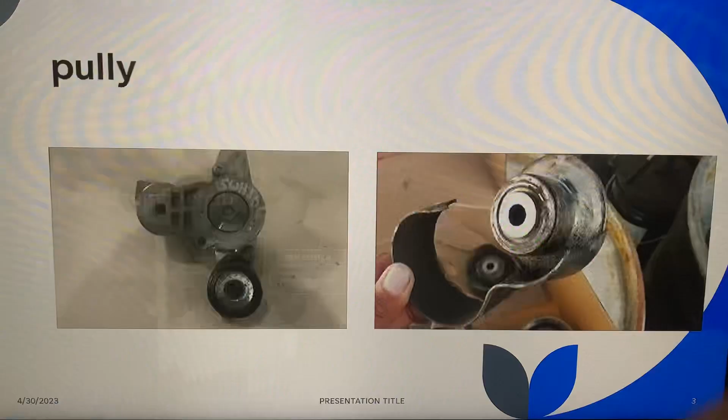This could be the reason why your belt is not staying on the engine fan. Here's the list: you want to check your pulleys, the belt, the fan assembly, and the hub assembly. This is the clutch, this is the hub assembly.

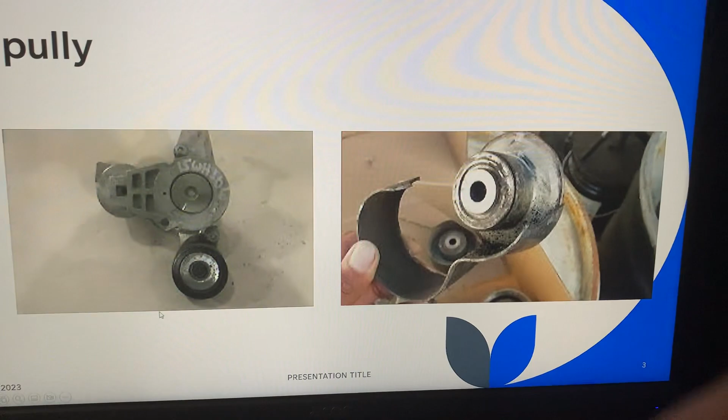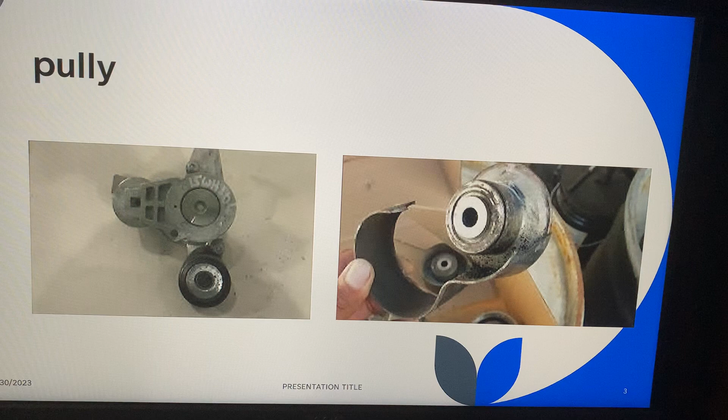If your pulley is shot, you need to get a new pulley. On the road it could be very expensive, and since we have part shortages, it could be a pain to get one. So once your pulley starts to look old or makes noise, it's better to change it and keep the old one just in case - it could help you out on the road.

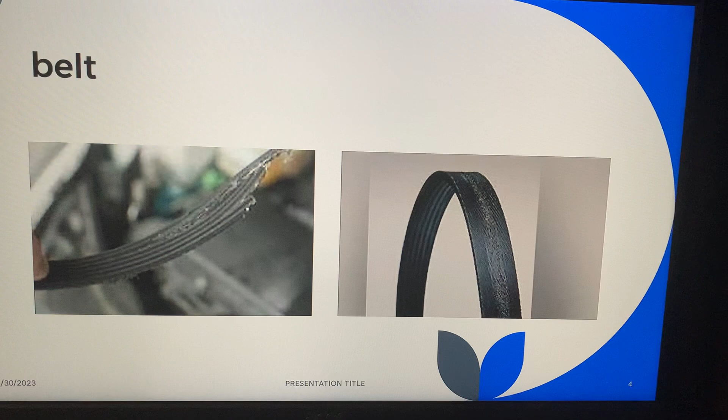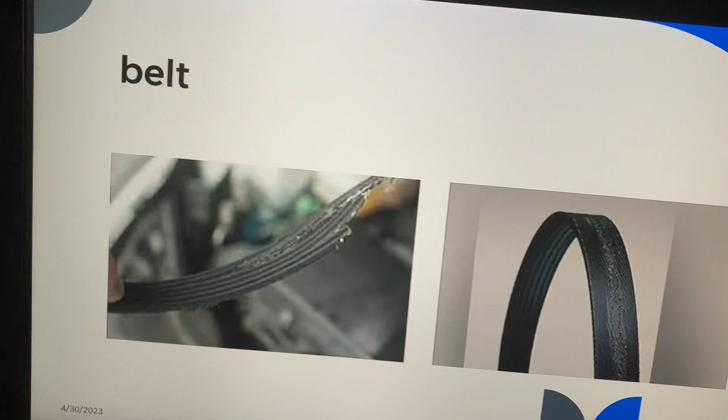Check the belt and see how it looks once it comes off. If it's all chewed up, it could be your pulley that's bad, or your fan assembly. Also look at the back and front and see how old it was. If it's a really old one, it could just be a belt problem.

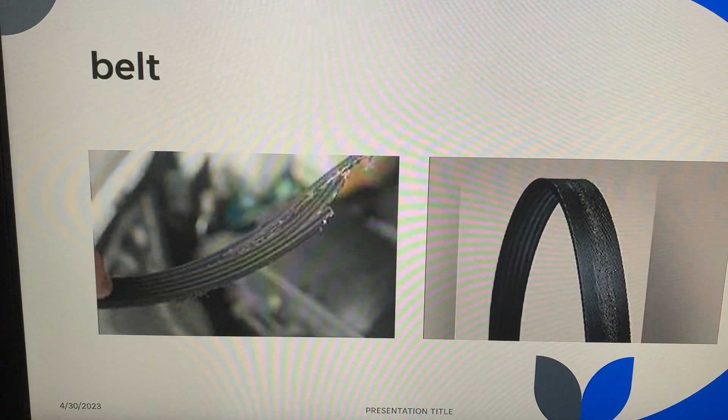But do look at how it's torn, so you have a better understanding if it's just a belt issue or another issue that's causing the belt to come off.

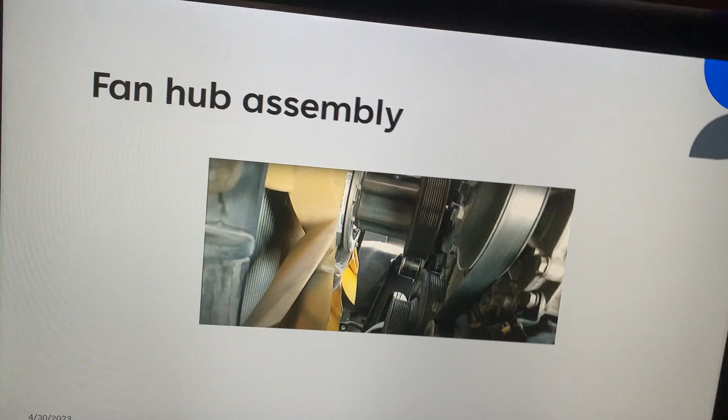Fan assembly - your fan hub might still look attached, but try to shake it. Put your hand right there and try to shake it, making sure the truck is off. If you can shake that thing, it's broken.

And putting the fan belt back on, you're basically grenading your radiator, because after a while it might help you get moving, but this will literally detach and hit your radiator, and who knows what else it's gonna hit when it breaks off from the engine.

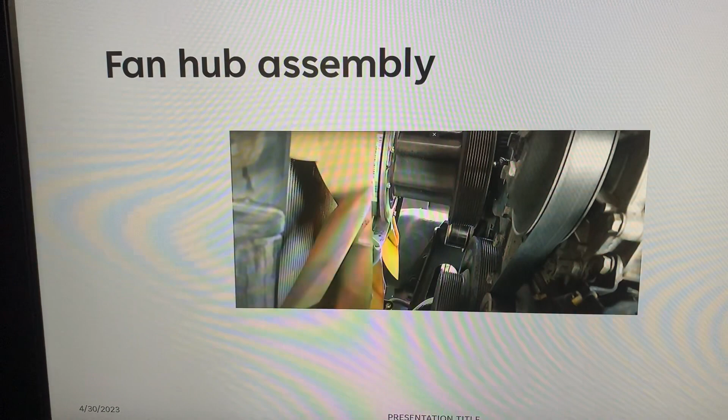There is a bearing here. When it's loose and you can shake it, the bearing inside is shot - it's no longer good. It's better to have it changed right away once you find out that's your issue, rather than destroying your radiator and having to break down on the road and tow the truck, because your truck is not going to move once you lose all the coolant.

So if your belt is okay and was new when it came off, and your pulleys are spinning freely, but you check your hub and it's shaking, get it replaced right away. Don't play around with your hub assembly, because it's gonna cost you thousands of dollars more in repair if you don't change it.

Once it starts shaking, just replace it. I would not try to see if I could make it to the next truck stop or something like that. You probably can keep the belt off and try to get the truck to the truck stop.

Just watch your coolant temperatures. If it starts to get hot, turn it off, wait, let it cool down, then you can move it again. But you need to know what you're doing in order to get your truck to a shop.

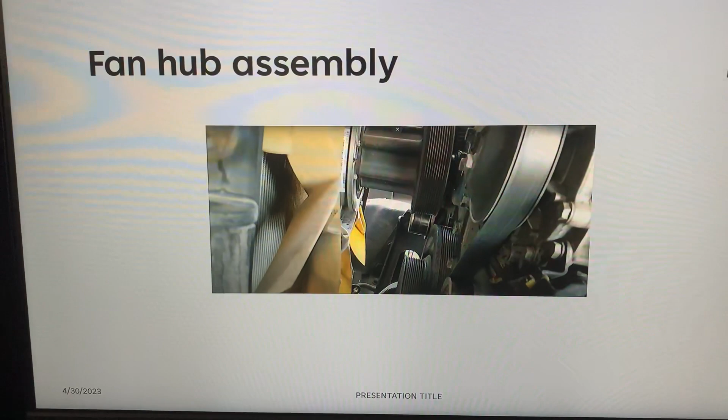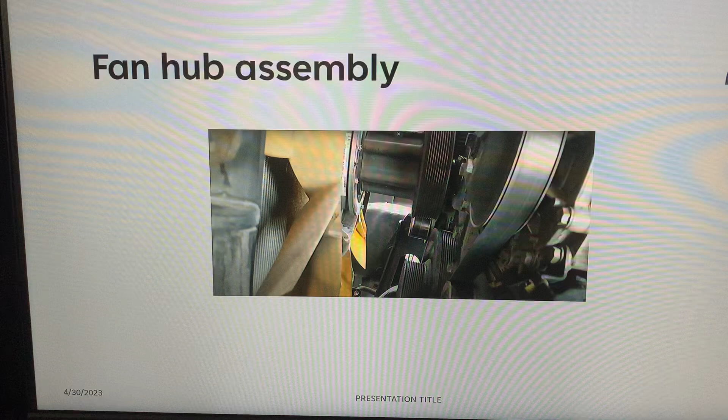You have to understand how the truck works and how it keeps cool. You need to know how normally your coolant temperature stays, so you don't want to go past that. Make sure you have coolant in your reservoir tank - if you put water, it will evaporate and your truck can overheat. So it's very important that you have extra gallons of coolant.

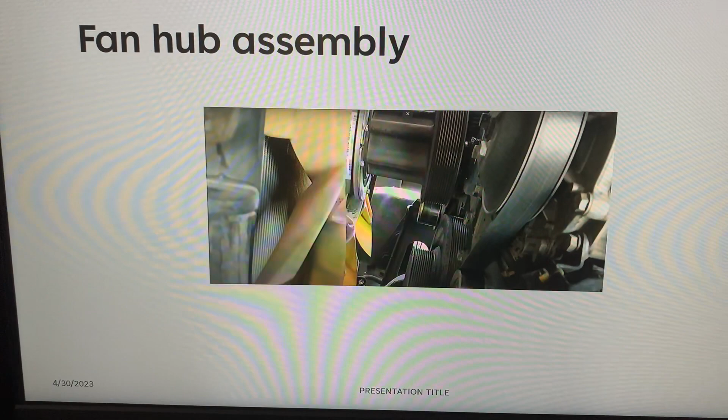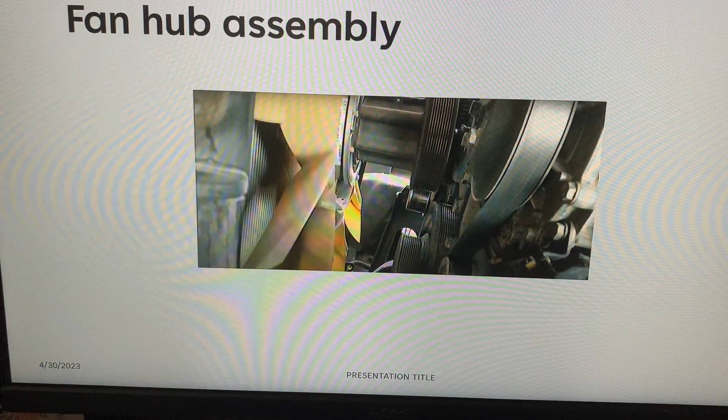Once the fan belt is off, the engine fan is not going to kick on, and if you overheat it, all the coolant will come out of the expansion tank, and you will lose like 2 or 3 gallons. That's something you want to pay attention to - it's not something you want to play around with. Nobody wants to play around with their unit, but it's just a situation you get into, and you have to deal with what you got into.